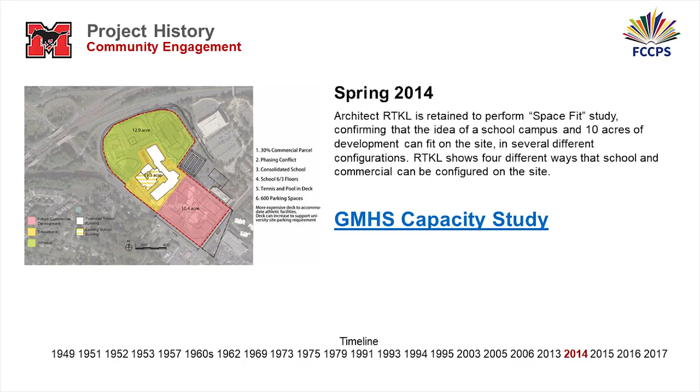In the spring of '14, there was a capacity study done by RTKL. As part of that capacity study and space fit, they started to look at the possibilities, the positives, some of the negatives, and what could be the consequences of looking at some sort of capacity study along with some sort of mixed use and development.

In October of '14, the Urban Land Institute did their ULI TAP study, and they provided a lot of suggestions to the school system and to the city about what the potentiality could be here in the City of Falls Church with respect to this particular site.

In June and July of 2015, there was further outreach. Cooper Carry was contracted to come into the city. Some of you in this room were probably part of those conversations where there was some visioning about what could happen at the school site. They prepared and finalized their report and delivered it in July of 2015. By the way, all of these reports I'm referencing are on our website, so you can go back and pull that information yourselves.

In October, there was a shared vision of the schools for the future, and there was a lot of community feedback. Again, many of you were part of those conversations as well.

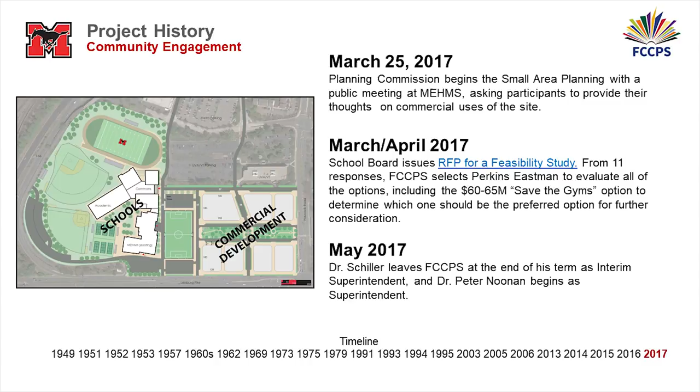One is we looked more closely at some options as part of a feasibility study done by Perkins Eastman, with the school board in mind. Out of that came this rendering that some of you have become familiar with. This feasibility study really provided us an opportunity to envision what this school could really look like if we were to go forward.

Following the June '17 feasibility study, we went out to the community, all of you here, and the school board and city council, and asked that we be able to put a referendum on the ballot for November. It was on the ballot—thank you very much for passing it. That bond did pass, as the city manager suggested before, giving us the authority for a $120 million new high school.

So we went through the RFDP process and landed with Gilbane, Stantec, and Quinn Evans, thankfully. Today we're going to get a chance to hear from them about the project that they've designed, which the RFDP down-select team—including a city council member, school board member, community member, and school staff—selected.

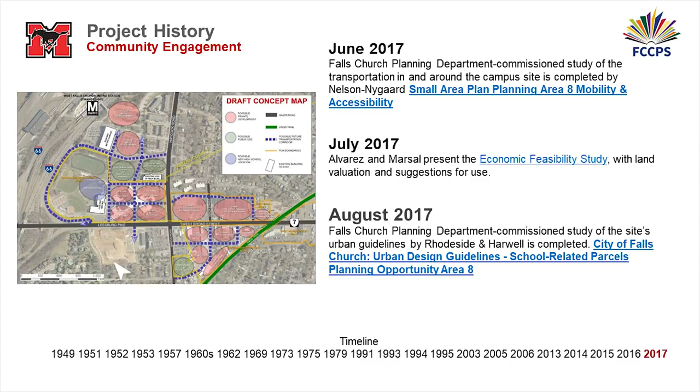So then we get to the August dates here, and you'll start to see how it begins to conceptually line out with spaces and some of the grid patterns for how traffic potentially could flow through the site. So that is sort of the history in a nutshell.

Thank you for hanging in there, even though many of you were part of it and know about it. But I do think it's important to note that we really have been at this dating all the way back to 2005. So fast forwarding to 2018, one of the things you will hear is that the Gilbane, Stantec, Quinn Evans team, when I talk about doing their homework, really did do their homework and went back and read every last report that had been developed, and as a consequence of that, took all of that feedback, including the ed specifications that we gave to them, and came forward with the design that you're going to see today.

So with that history in mind, I'm going to turn it over to Daisy Brangman from Brailsford and Dunlavey, who's going to take it from here.

Thank you, Dr. Noonan. So I'm going to recap a little bit and then we're going to move forward because I know you're all excited to find out where do we go next. We have this amazing team that's joined us.

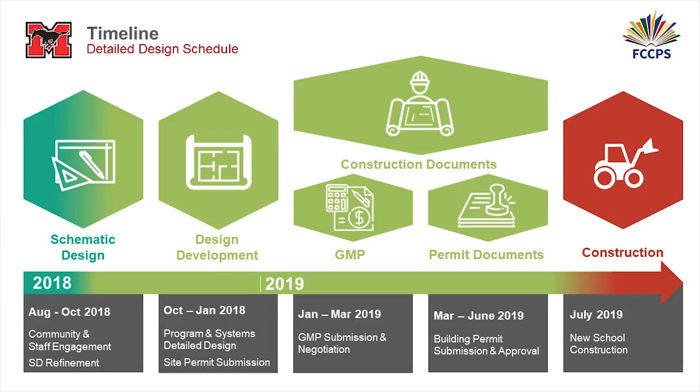The next step is construction documents, which actually consists of 2 portions of design. The first is the GMP, the guaranteed maximum price. The Gilbane team will be working on both the pricing, which will be based on the design development drawings, and then we'll engage in negotiation. This is where they give us the cost of construction for your building. Based on the information and that negotiation, they will start developing the permit documents. All of that information combined will inform the construction documents, which is what will be given to the various trade contractors, that will work with the Gilbane team to build the building. And that will take us to construction, which we're anticipating starting July of 2019.

So what is the detailed design process and engagement? The first phase is the schematic design, where we're going to engage with the community, Falls Church City Public Schools leadership and directors, George Mason High School department leads and CTLs, the teachers, and also our permit and partner agencies, including Planning Commission, Virginia Tech, UVA, WMATA. There's probably at least a dozen various entities that we've already started talking to. So the schedule is from August to October of 2018. We've actually already had a few meetings with some of the Falls Church City Public School staff and partner agencies. We're going to be doing this engagement.

And then August through October of 2018 is when we have our community presentations and our subcommittee sessions. The subcommittees that have been identified are academics, athletics, fine and performing arts, community use, sustainability and environmental, parking, and transportation. That's based on the feedback that Falls Church City Public Schools has received to date. Working together with Mary Beth Connolly, these are the categories that have been established.

So the meeting schedule: today we have our first presentation where the Gilbane, Stantec, and Quinn Evans team is going to give you a detailed dive and perspective into the design and the reasoning for it, a little bit more than what you've seen on the website and the fly-through videos. The next meetings are going to be September 6th and September 23rd, and that's when we're going to do our subcommittee breakout groups.

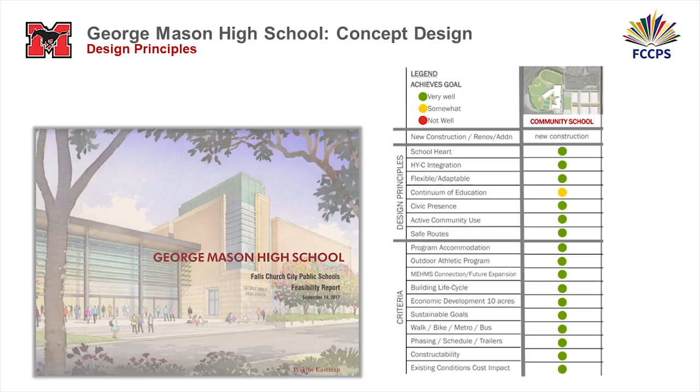And if it's on your website, I think we found it and we read it. So these are the covers of some of those reports. Honoring this work and trying to channel our best version of you is what we tried to do in the design. I also want to acknowledge especially the work of the feasibility study. It seems like it did a very good job of creating a framework around this idea of the community school, all the reasons that's important, and the opportunities of integrating the academic campus with the West Falls Church Economic Development Project. So we've done our best to understand and honor all of that work.

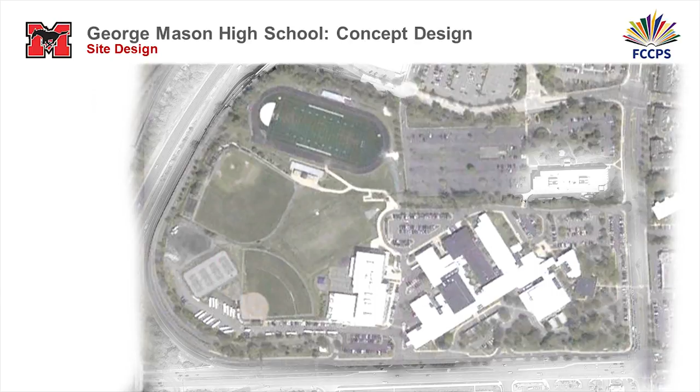Beginning with the site, here we are on the 34-acre high school, middle school campus, the western gateway into Falls Church City. Just an aerial shot—this is the existing campus as it is today. You recognize the big airport terminal looking floor plan of George Mason High School next to the Mary Ellen Henderson Middle School, the existing athletic complex, and then the Virginia Tech and UVA building up in the upper right corner. Haycock Road to your right, Route 7, along the bottom. The facilities that remain existing throughout this project are the existing athletic stadium complex and the existing baseball field and middle school.

Everything else is on the table. And so at the end of the day, this is what we've created. As Dr. Noonan said, we've consolidated the athletic complex—a new softball field, new tennis, new multi-use field, one consolidated athletic complex. Right down the middle is a main pedestrian promenade that links parking straight back to the athletic stadium complex.

Reserving 10 acres for the commercial development project, the Virginia Tech UVA campus to the north. The trapezoid shape right there is parking, and that leaves a very small piece of land for a building for 1,500 high school students.

The other features of this proposed site plan: it's designed to retain bus parking for 20 school buses, although there may be an opportunity to relocate that facility off-site, in which case we can create either more car parking or more outdoor athletic space in that area.

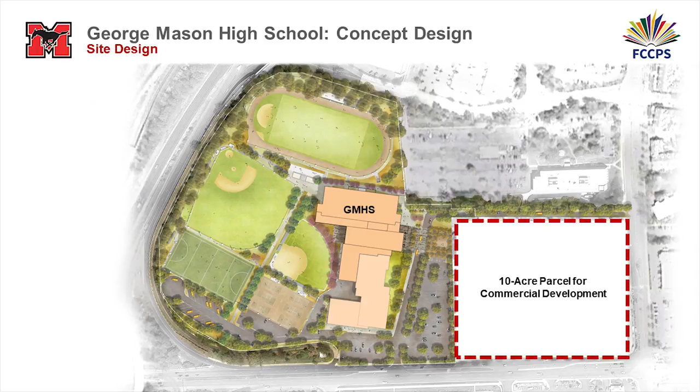Then you'll see the space reserved for the high school. So that is the layout. The road continues from Haycock along the top edge of the property, and then it angles down to the existing intersection on Route 7 where you would enter now for the middle school and where the traffic flows out in the afternoon. That road exists, and if you look at where the trees are, that is the entry to the school—you see those two yellow rectangles, those are school buses. That is the entry of the school.

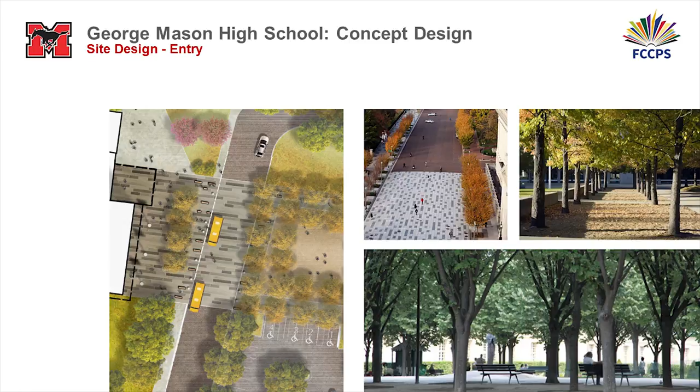There is a blow-up of that space, and you'll see there's specialized paving that links this bosque of trees on the east across this raised paved area for pedestrians, separated by bollards at the curb line, and then a very large entry plaza into the high school. You might think of this as a huge entry mat facing the community. But this is the sense of the quality of the pedestrian space that we have in mind for the entire school campus. And then on the back, that arc there is the outfield fence for the softball field.

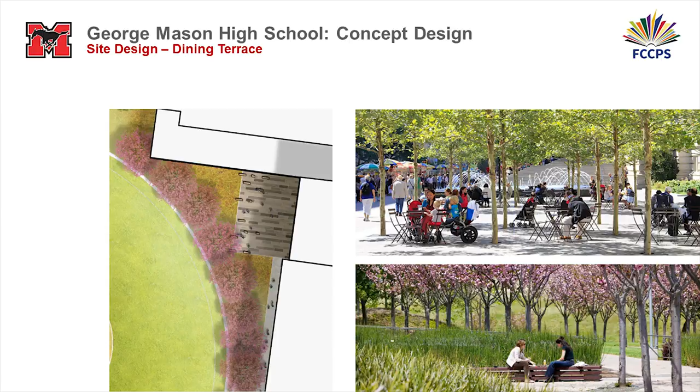Those dogwoods or cherry blossoms, whatever they are, along the edge—you'll see that space just to the right, that's the dining terrace. So the cafeteria opens right out to a terrace that looks over, 10 feet above, looking over the softball field. And so the canopy of those trees will be well above your head, so it won't obstruct views onto the softball field.

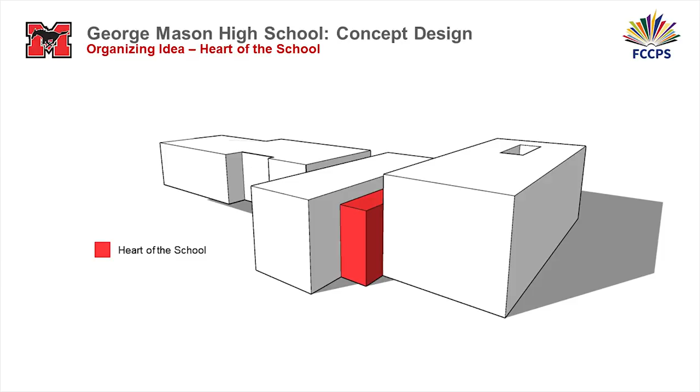So in terms of the building, now that you understand those two bars, the notion of the heart of the school is a very strong organizing idea. Again, the heart of the school came from the feasibility study done by Perkins Eastman a year ago. And it was around the heart of the school that we considered how to organize all of the academic and community spaces that are part of the high school program.

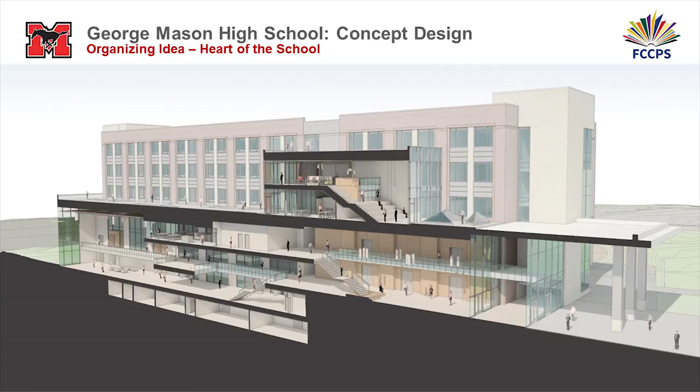So it's something like this, and it becomes something like this. The diagram, the idea becomes this very dynamic, very vertical, very elongated heart of the school, where we have the gymnasium lobby at the far west, multi-height space. You enter, the auditorium is immediately on your right as a double height space. Then on the second level, the first level up, is the media center, the maker space, things of that nature. Above that, where you see the indoor amphitheater, that connects the third and fourth floor in a very flexible, collaborative, exciting space, and Bill will show you that in a moment. And then outdoor learning on top of that. So from top to bottom, from front to back, all of that is the heart of the school.

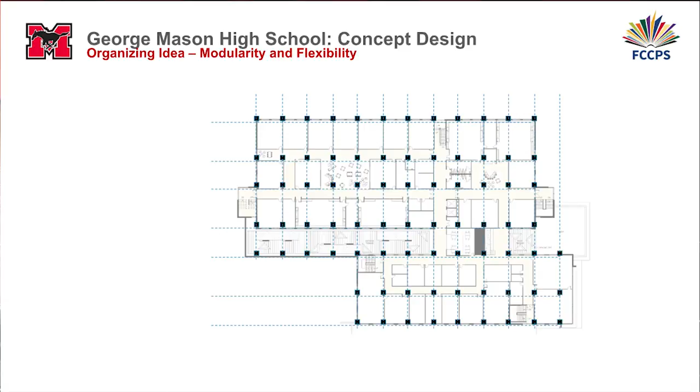The other idea is, how do you create something that's easy to build and remains flexible for the life of the building? You do that by creating a modular and flexible building structure. So very few, as in no, load-bearing walls. This is a very simple column grid that allows one classroom or two to become a lab that are part of a pod which can repeat itself over many floors. And so it looks something like this.

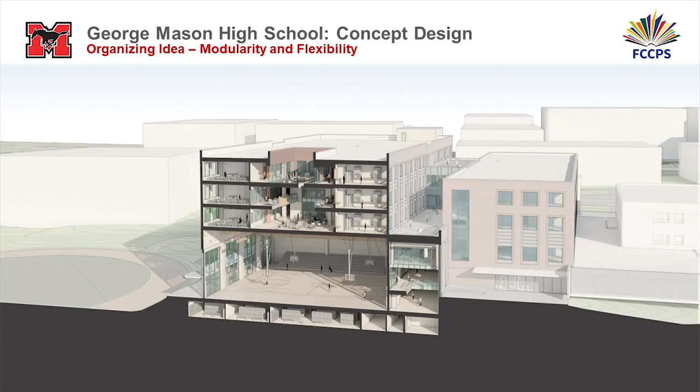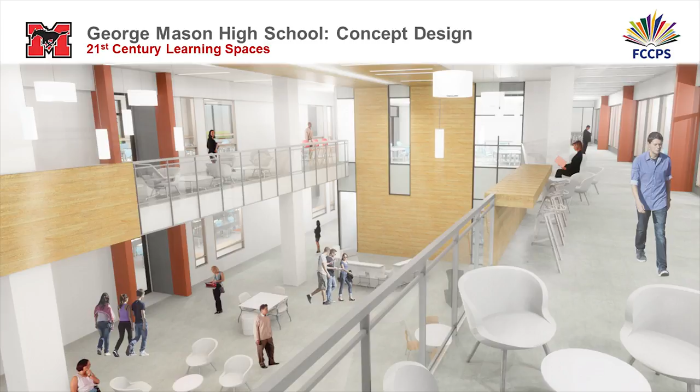If we were to cut a section through that wide bar, you can see how we have stacked academic space, a double height collaborative space, an outdoor terrace on top of the larger volume of the gymnasium, which sits on top of the locker rooms at the lowest level. We'll look at that in just a moment. And there in the middle is the heart of the school. The 4-story wing, and then a space that mitigates the adjacency to the middle school on the right.

So Bill, can I turn it over to you?

And as part of that, when we think about a traditional setting, this ought to look very familiar to all of you. This is very familiar to me, the school that I went to. It's the classrooms, the laboratories, flanking either side of a double-loaded corridor. It's really the sage on the stage approach, sometimes called cells and bells, and it really recognizes students as all being the same, a one-size-fits-all approach.

Very different now what we're doing in education, particularly if you think about Virginia's new profile of a graduate, which goes into effect this year. So this year's entering freshmen are beholden to that.

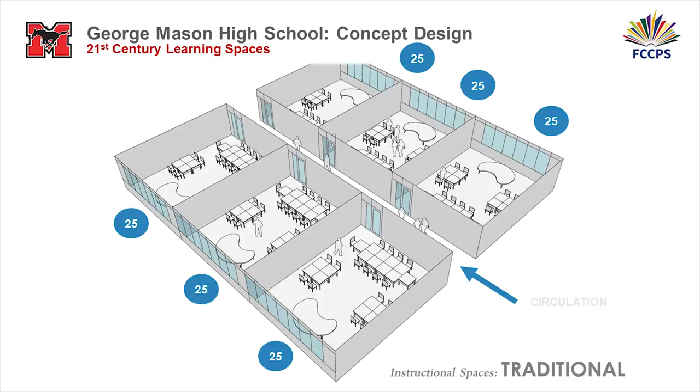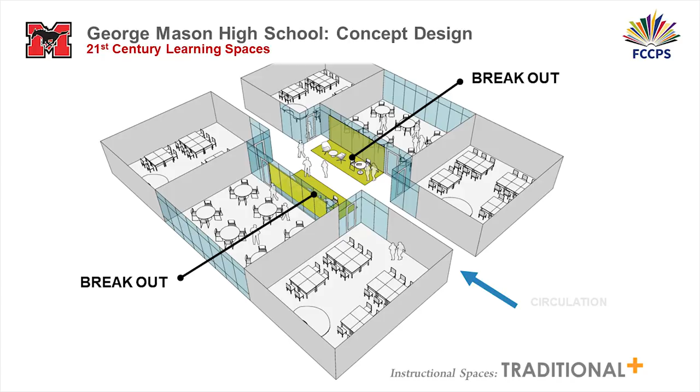The way we're seeing the spaces and places of schools evolve in response to 21st century education, in response to the new profile of a graduate, is to begin to break down some of the walls that separate and define the spaces. Along with the traditional classrooms and laboratories, you have differentiated spaces for differentiated instruction. Within and supporting the classrooms and laboratories, you have places for breakout spaces, spaces for mindfulness, where students might go and retreat with another student or a teacher.

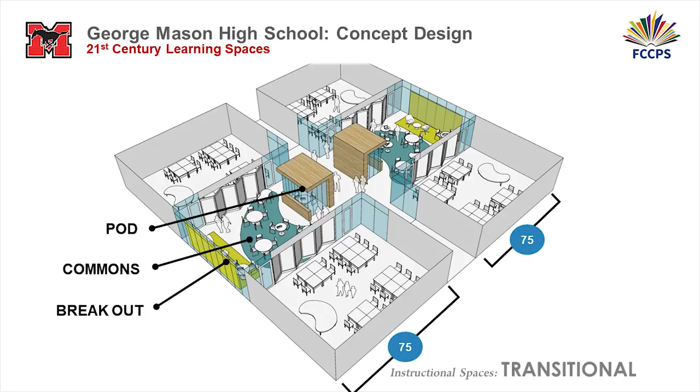You have spaces for not only whole group instruction, but small group instruction, also combined studies. And so the idea is to provide a variety of spaces within the school where any number of activities can happen, not just lecture, not just whole group instruction, but others in support of that.

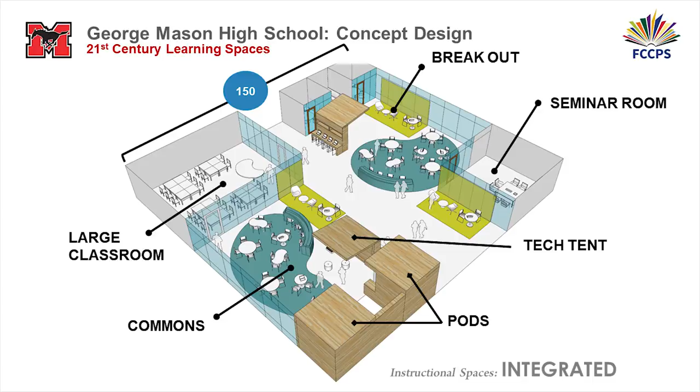I think what you'll probably see, not today but in the future, is a further erosion of that, so that as students pursue their interests, in concert with this new profile of a Virginia graduate, teachers will assume not just the role they traditionally have in a classroom, but of guiding students in that effort. And so the walls continue to break down. There's more differentiated spaces, more resources for the students and teachers to have. We've actually anticipated that in some ways in the design, as you'll see in some of the spaces.

And so the floor plan of the building, which Dirk is going to talk about in just a minute, it can be broken down into pods, traditional pods that could be departmentalized or might be within grade level, or however you choose to do that.

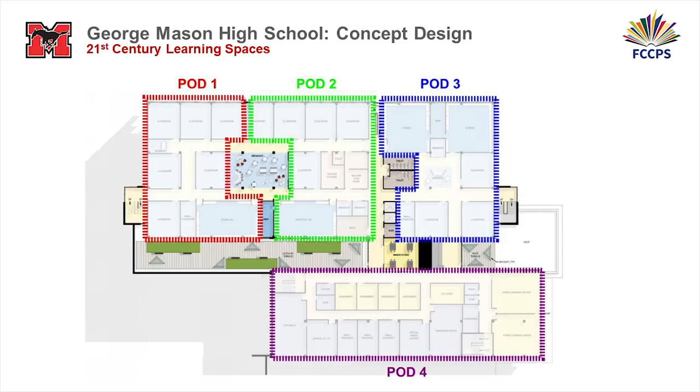And then within those pods, you'll see a number of ways in which students can access these transitional spaces from their classrooms. And one thing I want to point out, and I'm sure it's something you're talking about right now in the community, is the visibility and the transparency.

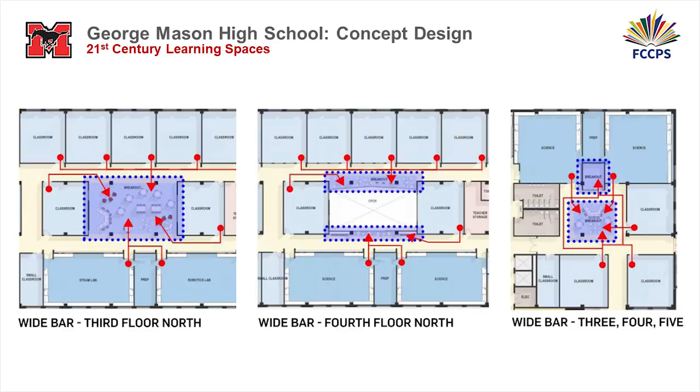So if you think about those spaces outside of classrooms, if the walls separating those spaces and the classrooms were opaque, if the teachers couldn't see their students, they wouldn't be inclined to let them go outside the classroom, because ultimately they're accountable for those students. They have to have visibility.

And when we visit schools that have transparency between the classrooms and these breakout and ancillary spaces, those spaces are teeming with activity. When we visit schools that have given a nod to the idea of 21st century learning but haven't followed through with this idea of transparency, those spaces in which the school systems have invested a lot of money sit vacant in the middle of the day, which is really a shame for the amount of money they spend.

Okay, you can't comment on that one. Whatever it was, it just fell.

So what we're going to show you here are some of the spaces, some of the images, three-dimensional renderings of some of the spaces that are consistent with this 21st century learning transitional integral style approach to design in support of that learning.

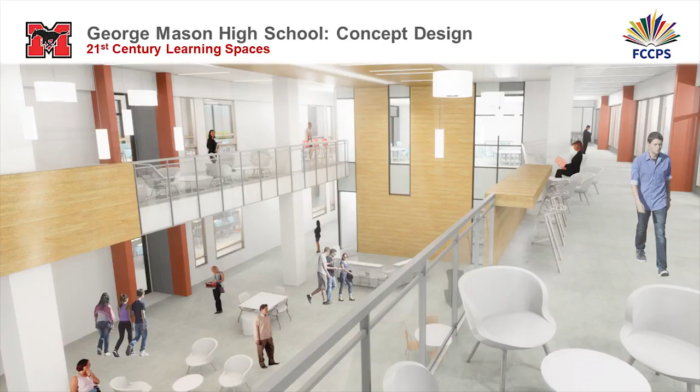This is that first slide that you saw, where we are here. Dirk is going to talk to you about the floor plans, but you're on the 4th floor here, the main academic wing. On your right, you have classrooms and laboratories. On the other side, you have classrooms and laboratories.

You have single-loaded corridors here, and you'll see that the corridors are eased to create eddies, breakout spaces where students can gather together, either in isolation by themselves to think, or to work in collaboration with their peers.

And then on the 3rd floor, you have this learning commons. What you'll notice when the school opens is that there'll be a variety of furniture and a variety of ways to access technology, and different types of manipulatives for making and communicating and collaborating, these 5 C's of 21st century learning. One thing I'm going to point out is, again, we're on the 3rd and 4th floor here.

We're going to jump up to the 5th floor, and on the 5th floor you won't be able to see it, but I'll point out there's a skylight. The point being that in the space you're about to see on the 5th floor, light pours through. If you go back once again, Dirk, to flood the 3rd and 4th floor, the interior spaces with natural light.

All of the classrooms are outward facing on an outside wall, but there's interstitial space between them. And so that those aren't dark and unhappy places, we brought in natural light from above.

So going to the 5th floor, again, similar idea, except that instead of this open space to below that you had on the 3rd and 4th floors, you have on the 5th floor this outdoor gathering space. So again, classrooms on your right, on your left, and you can see the variety of breakout spaces and access to technology, again in support of 21st century learning and differentiated instruction.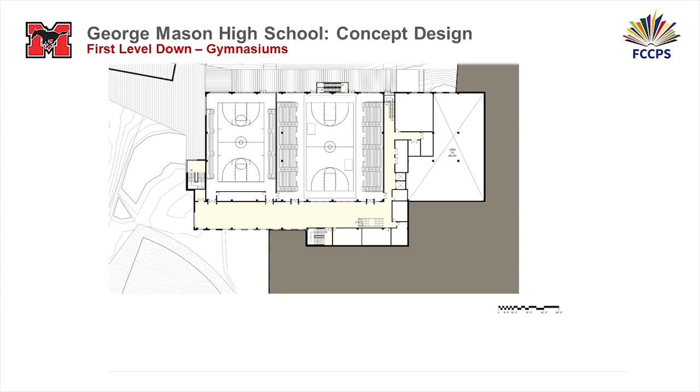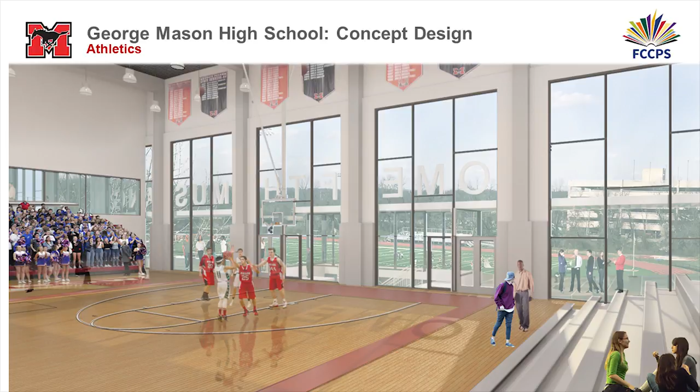One level down, you'll see the outline of the stairs coming down from above. This is the open stair, and you arrive at this grand lobby that serves the main competition gymnasium and the auxiliary gym, with an emergency egress out the back. So the only thing that really resides at that level are community access and student access to that gymnasium. I'll point this out, and I'll see it again in a moment - these are separate stairs, scissor stairs, into the gymnasium directly from the boys and girls locker room below.

So the stair here, now I'm at the lowest level. This is the stair, and you'll see the door that connects this locker room to that stair, and that stair goes up while this one comes underneath. So the boys and girls locker room up to the gymnasium, they each have their own secure stair.

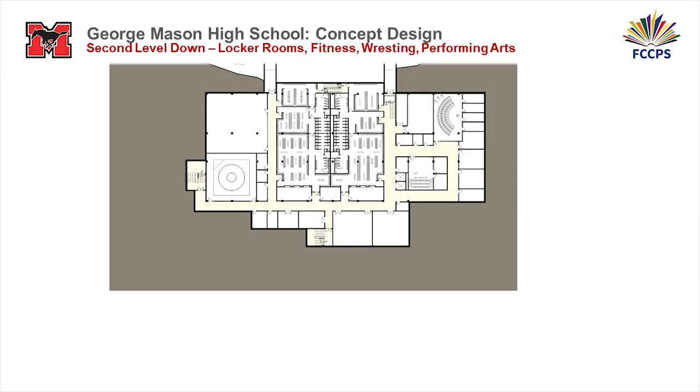At this level, we have the wrestling room, the fitness room, and each of these hallways exit directly to the football field. This is performing arts instruction, and this is the back stair up to the back of the auditorium above. So the back of the building, these are the vomitoriums that connect those two corridors that we just looked at. Players will be able to come directly from the locker rooms directly onto the football field through these tunnels.

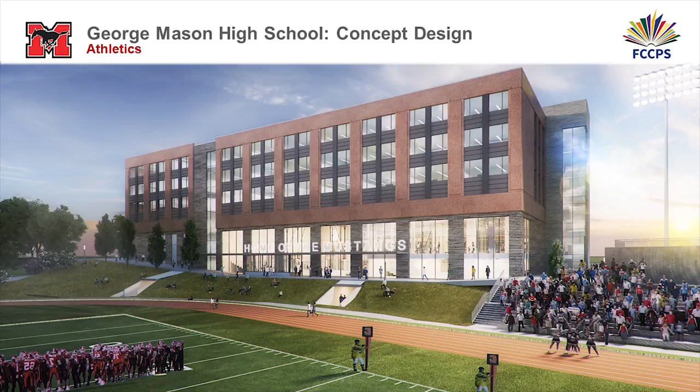This is all the glass in the athletic spaces, and then all of this is academic space on top.

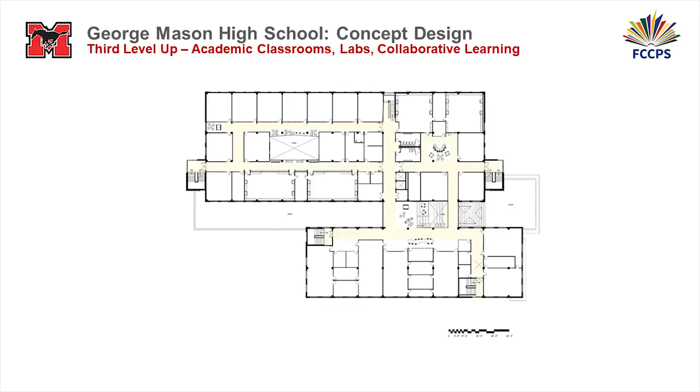The fourth floor, very much like the third floor, and again, here is that stair connecting the third to the fourth floor. Where I'm standing would be on a bridge that looks back over, and if I were to go to the right, I would be entering that wider bar, and you can see the outside wall of that wide bar over there. So the idea of the bar also allows every classroom to have access to natural light.

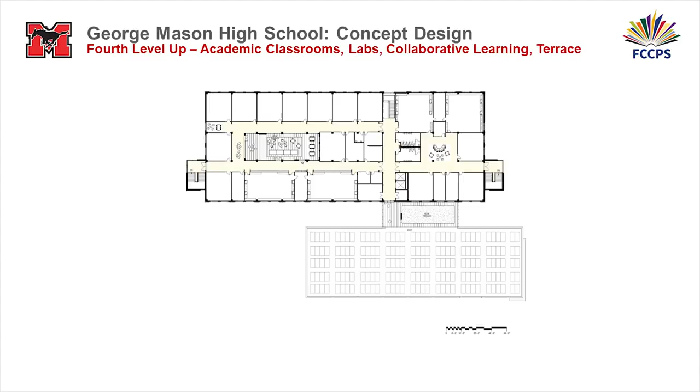And then again, from the fourth floor overlooking the third floor, Bill mentioned this earlier. And then once I'm at the top floor, fourth level up, all academic space and the outdoor terrace. Simple, flexible, secure, state-of-the-art learning space. And so there's that terrace.

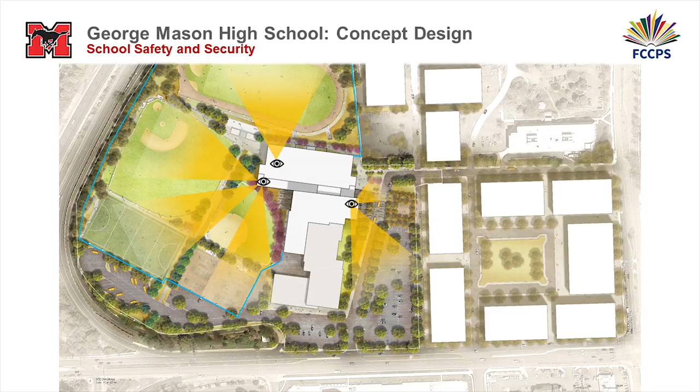Security begins at the scale of the site. All of these orange areas here are meant to suggest how much of the site you can actually see from inside the building. So passive supervision and surveillance of the school site from within, the idea of eyes on the street. So when you're on this campus, there's a very good chance that someone inside the building has already picked you up.

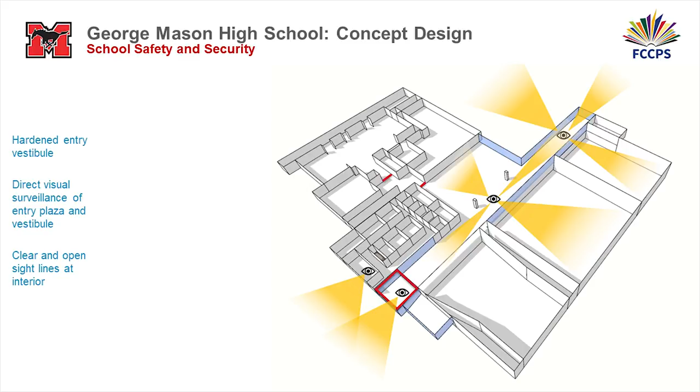From this area, I can see into the gymnasium. I can see actually out onto the athletic stadium field. And likewise, when I'm here at the end, I can look all the way through the auxiliary gym. I can look back out onto the athletic complex as well. All from this one part of the school.

As we go up, each of the academic floors is isolated. So if I were to come up here, I can't get past the barriers. It's much like an office building in that regard. There's a core, and then there are stair towers that serve the occupant load. So if there was an intruder that somehow gained access, or there was an event that occurred here, that trouble, that access is contained to areas on one side or the other of these red bars.

This is where the doors will be on automatic closers in the event of an alarm. Within each of these areas, there are also stairs indicated by the blue. We talked a lot about this on Thursday with Officer Carter and Mr. Polera. The notion of run, hide, fight is going away in favor of evacuating the building. But if you are in a place in the school where an active shooter event starts and trouble is over here, stairs are available and convenient in other areas of the school to evacuate the building.

We've talked about a number of strategies to consider and incorporate in the design going forward that would improve lockdown concerns around cover and concealment specifically. We can talk about that as we go forward in the design.

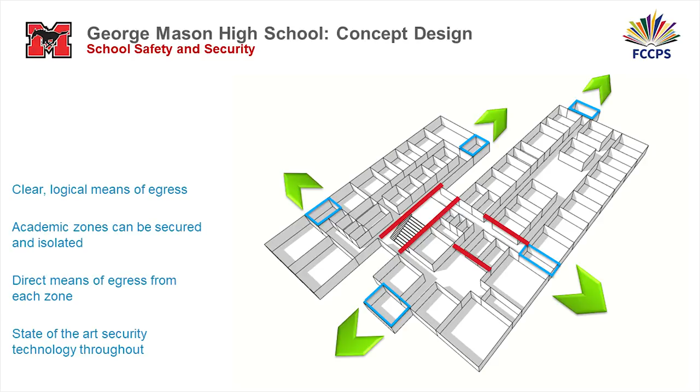As we move forward towards the building and the building line, we're going to be using a high-performance building envelope. Part of that is addressing the glare that may happen, which is unwanted light. So as we look at the site, it was extremely important for us to provide a lot of softscape, because softscape absorbs the light and prevents it from bouncing towards our building.

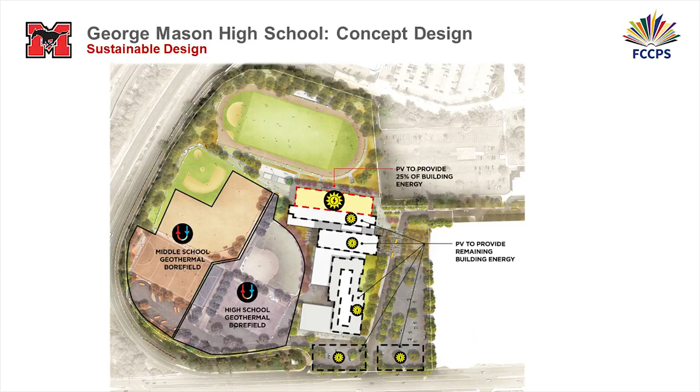What you also see here is a diagram that talks about our net zero strategy. As part of our baseline project, we show geothermal fields. In addition to that, we show the approximate area that's needed to obtain net zero energy with the use of PV panels.

So part of our sustainable strategy is, of course, achieving LEED, and we are on target to achieve LEED Gold. What this shows here is our energy use intensity, a number we use to describe how efficient the building is. Part of that is the use of systems, and geothermal plays a huge role in that, LED lights as well. So what we're targeting here is 22.4. What that means is that through the use of the right materials, efficient systems, and right siting of the building, we're able to achieve an energy use intensity index of 22.4.

And from that, with the addition of power generation, we can get to net zero. So as we move forward, we talk about the different ideas of getting to our baseline: reduction, reclamation, and absorption. This includes the use of high efficiency equipment, the VRF systems, in addition to the geothermal, boilers, and occupancy sensors to help reduce the use of lights, LED lighting we talked about, and of course the glazing at the building perimeter.